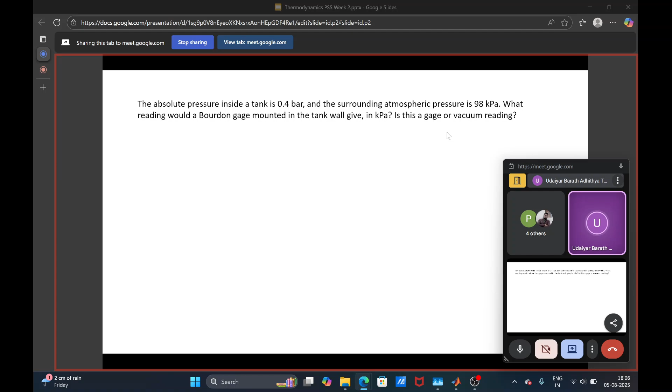So we have a tank, we have a gauge there, and we know that inside the tank the pressure is 40 kilopascal or 0.4 bar. That is the absolute pressure, and outside this tank is your atmosphere, which is at 98 kilopascal. Because the Bourdon gauge shows the difference, it will show the difference between these two. So you'll get 58 kilopascal, but that will be lower than atmospheric pressure, since your inside pressure is lower than atmospheric pressure. So this is a vacuum reading.

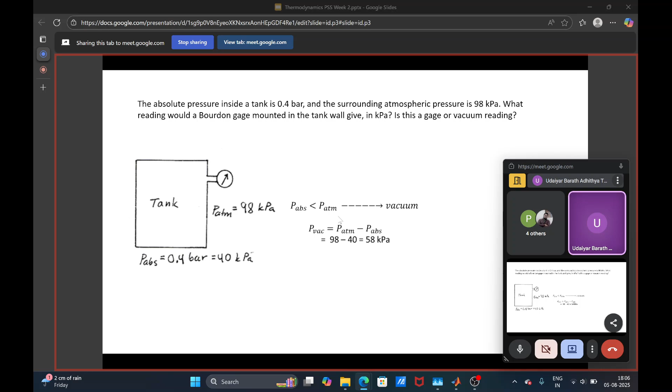So next question, a tornado rips off a 100 square meter roof with a mass of 1000 kg. What is the minimum vacuum pressure needed to do that if we neglect the anchoring forces? So you have a house and the roof mass is 1000 kg, and because of this tornado the roof is getting ripped up. The area is given, just 100 meter square. So what should be the minimum pressure inside the house? What is the vacuum pressure needed?

So outside, because of the tornado, your pressure has dropped. What should be the difference in pressure for the roof to be ripped apart? Try solving this. You can estimate the forces, and using that force and the area, find the pressure difference, and that will give you the answer. You can assume atmospheric pressure to be 100 kilopascal for this case, or 1.01 bar.

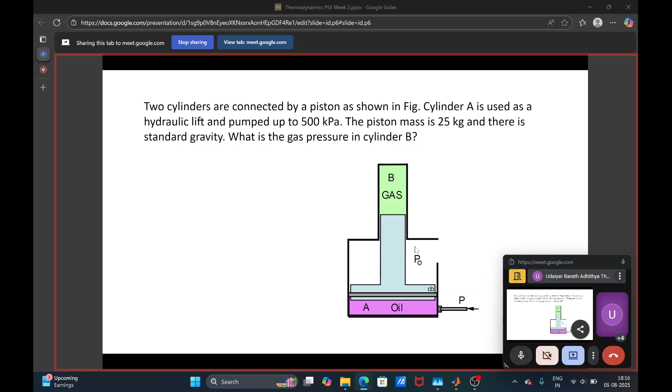So since the diameter of A is 100 mm or 0.1 meter, area A is 0.00785 meter square, and similarly for the 25 mm piston B diameter, area B is 0.00491 meter square. So they have found out the areas. You know the pressures except at B. So rearranging this equation, you get something like this. Substituting the pressures and the masses which you know, pressure at A is 500 kilopascal, which is given in the question, and the mass is 25 kg, and atmospheric pressure we can take as 100 kilopascal. So the force because of pressure at B comes out to be 2.944 kilonewton. So the pressure at B comes out to be 5996 kilopascal, just close to 6 megapascal.

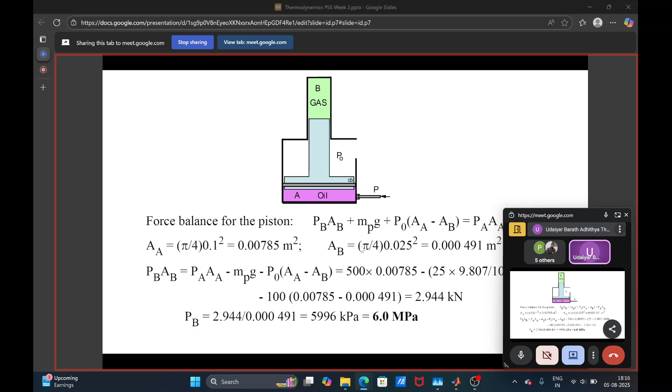So next question: the sketch shows three physical situations. Show the possible process in a PV diagram. So one, you have a piston cylinder arrangement. There is a rest here, but the piston is at the top. And in the second case, you have a similar piston cylinder arrangement, and the piston is supported by a spring. And in the third one, you have a piston, and there's a top rest where the piston cannot move up after that. So what do you think the possible process can be?

So assume in each case the piston is moving up. In the first case it was initially at the rest and then it's moving up. Similarly in B it is moving up, and even at C. So how will the process look? Try to sketch each of the cases. So we'll see how to solve this.

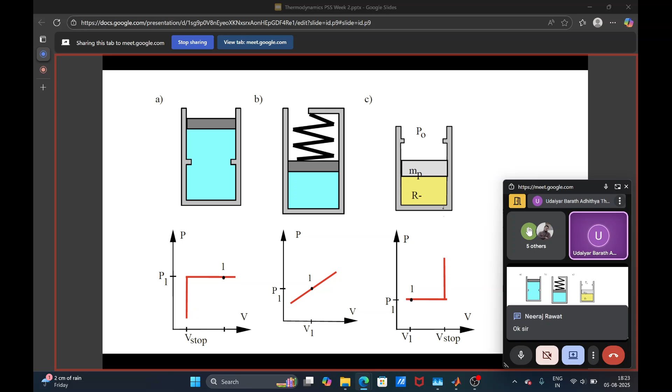Is it clear? Okay. So I will move to the next question.

The air drag force on a car is 0.225 A rho v square. Assume air at 290 Kelvin, 100 kilopascal, and a car frontal area of 4 meter square, driving at 90 kilometer per hour. How much energy is spent to overcome this?

Again, this is like estimating the work which has to be done. The air drag force is just like friction which is acting on the car. That is given by this expression here, 0.225 A rho v square, where v is the velocity and rho is the density. They have given the air pressure, the temperature, the frontal area of 4 meter square, and the velocity at which the car is being driven, 90 kilometer per hour. So how much energy has to be spent for this?

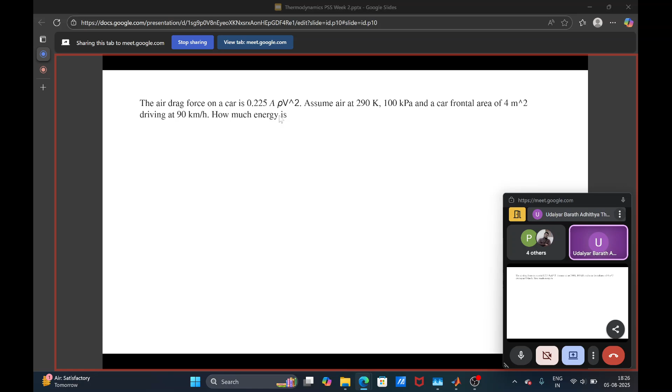For this, we now need to estimate the density. We know velocity; we need to find out density to estimate the drag force acting on the car. And for estimating density, what do we know? We know pressure and temperature. So air, we can assume it to be an ideal gas. This is how we'll solve it.

Density rho is equal to 1 by the specific volume. Assuming air as an ideal gas, we get PV is nRT or mRT. You have to be careful which R you are using. So rho is P by RT. You'll get 100 divided by 0.287 for air, into T is 290, which is given. From that we can estimate density. Density comes out to be 1.2015 kg per meter cube.

The velocity is given as 90 kilometer per hour. So 90 into 5 by 18, or 1000 by 3600, we get 25 meter per second. So now that you know rho and velocity, we can estimate the force.

So force is 0.225 A into rho v square, and maybe the question was to be driven for half an hour. Maybe I'll rewrite the question again while uploading. So delta x is v into delta t. So v we know is 25 meters per second. So delta t is 30 minutes. So 30 into 60, we get 45,000 meters. So that is what has been driven.

The car is driven assuming constant velocity of 90 kilometer per hour. So for half an hour, it will give you 45,000 meters. So force is 0.225 rho A v square. So A is given 4 meter square, rho we have calculated 1.2015, and v is 25 meters per second. So 25 square, we get force 676 Newton. So from there we can find out work. So work will be force into the length, or F delta x, which will come out to be 676 into 45,000. So that comes out to be 30.42 megajoules. So that is the amount of energy or work which has been spent.

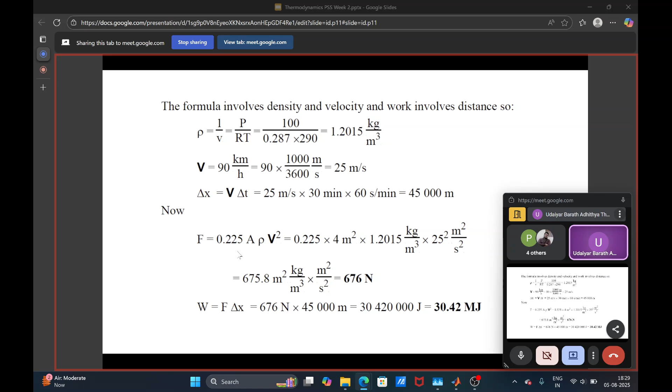So any doubt in this? Okay. So moving on.

We have a 400-liter tank A, see the figure below, contains argon gas at 250 kilopascal and 30 degrees Celsius. Cylinder B has a frictionless piston of such mass that a pressure of 150 kilopascal will float it. So it has a weight such that applying 150 kilopascal we can lift the piston. So that's what is given. The argon is contained in a 400-liter tank, and pressure and temperature is given. The valve is opened and argon flows into B and eventually reaches a uniform state of 150 kilopascal and 30 degrees Celsius throughout. So what is the work done by the argon?

So this is the process. If you see, this is similar to what we saw in the first sketching problems. Initially the pressure here is more than the pressure required to lift the piston. The piston requires just 150 kilopascal. So it will reach equilibrium when, because you are opening the valve, the argon will try to flow and it will lift the piston, and because you are expanding, your volume is increasing and your temperature is the same, so your pressure will reduce. By the ideal gas law, PV equals mRT, so if m, R and T are constant, PV is constant in this case. So with increase in volume, the pressure of the argon will go down. It will reach a state where it is reduced from 250 kilopascal to 150 kilopascal. There the piston will come to equilibrium and it will not move.

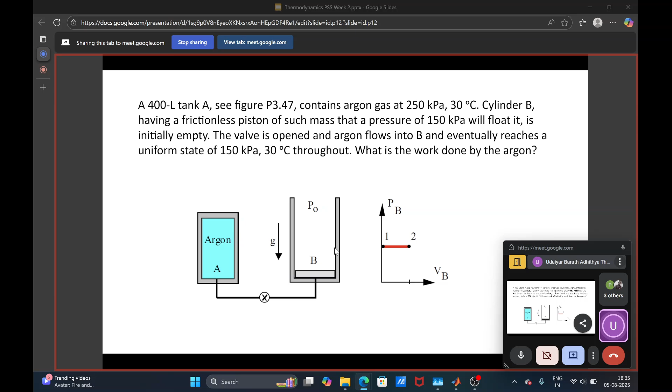So the external force which is required, which is acting, so indirectly what we are doing is, without finding out the mass of the piston, because the piston will move at 150 kilopascal, so that is the resistance which is acting on the piston. So P naught plus the piston weight is 150 kilopascal. So P external into VB2 minus VB1, we get 150 into 0.2667 minus 0. So it comes out to be 40 kilojoules.

Is this clear? So what we did is, based on the data, we estimated the initial and final volumes, and we didn't care about how the process is happening of the argon. And using that change in volume, we then used the external force which is acting on the piston, which is the resistive force, to estimate the work done of the system. Okay, I assume there is no doubt in this. So I'll move to the next question.

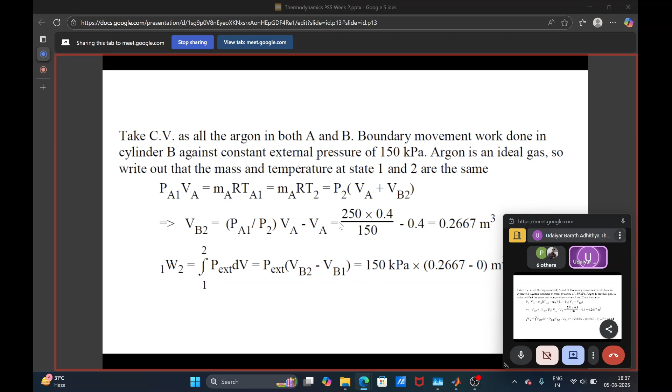Here, a 0.15 meter diameter pulley turns a belt rotating the drive shaft of a power plant pump. The torque applied by the belt on the pulley is 200 Newton meter and the power transmitted is 7 kilowatt. So determine the net force applied by the belt on the pulley in kilonewton and the rotational speed of the drive shaft in RPM.

So it's another form of work which we have to estimate. What is given is, you have a power plant pump which is used to pump water and so on. It is connected through a pulley, driven by a pulley which is of 0.15 meter diameter. The torque applied to this pulley by a belt is given as 200 Newton meter. They say the power transmitted is 7 kilowatts because of this torque. So we need to find out the net force applied by the belt on the pulley in kilonewton and the rotational speed of the drive shaft.

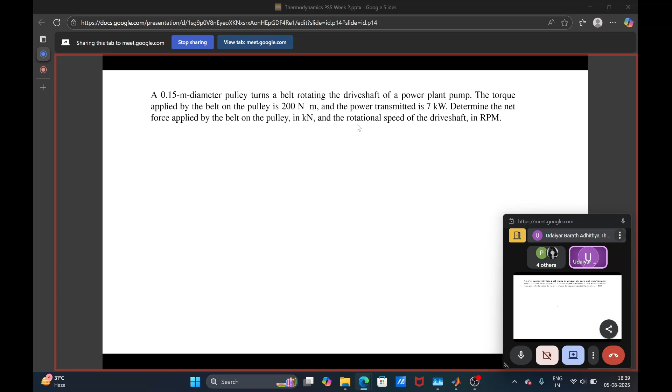And then power transmitted, power is your torque into omega, with which you can find out the rotational speed. We know the shaft power and we also know torque. You can estimate omega. So omega is 2 pi n by 60. Using that we can estimate n. So omega is power divided by torque, into 60 divided by 2 pi. So that's what we'll get. So n comes out to be 334.2 rpm. So it's just a simple problem on the torque and so on.

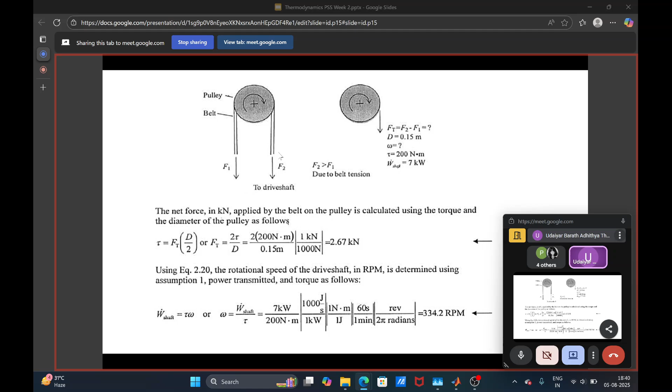So next question is on thermistor, basically a temperature measurement. You have a relation between resistance and temperature T for a thermistor, which closely follows R equals R naught exponential beta into 1 by T minus 1 by T naught, where R naught is the resistance in ohms measured at temperature T naught, and beta is a material constant with units of K.

For a particular thermistor, R naught is 2.2 ohms at T naught, which is 310 Kelvin. From a calibration test, it is found that R is 0.31 at 422 Kelvin. Determine the value of beta for the thermistor and make a plot of resistance versus temperature.

So I think it's a simple problem. I can try this. I'll give you a minute. Try.

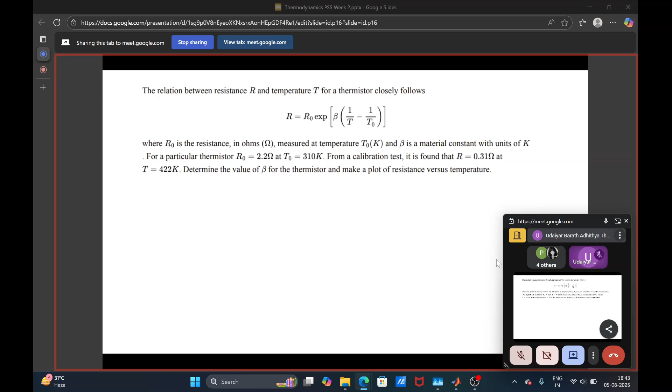So if you see, this is the expression. R is R naught exponential beta into 1 by T minus 1 by T naught. So we can write it the other way: ln R by R naught gives you beta. So beta comes out to be ln R by R naught divided by 1 by T minus 1 by T naught. So you know two points, basically, R naught at T naught and R at another T. Substitute these values here, and that will give you beta straight away. It will be 2288.9 Kelvin.

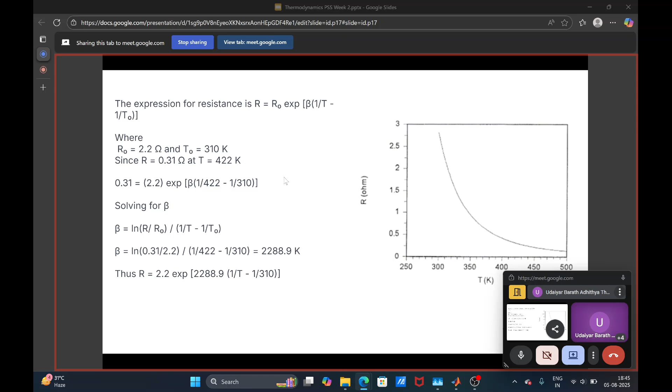So moving on to the next question. A fan forces air over a computer circuit board with surface area of 70 centimeter square to avoid overheating. The air temperature is 300 Kelvin while the circuit board surface temperature is 340 Kelvin. I think I have not given the table. Using the data, determine the largest and smallest heat transfer rate in watts that might be encountered for this forced convection.

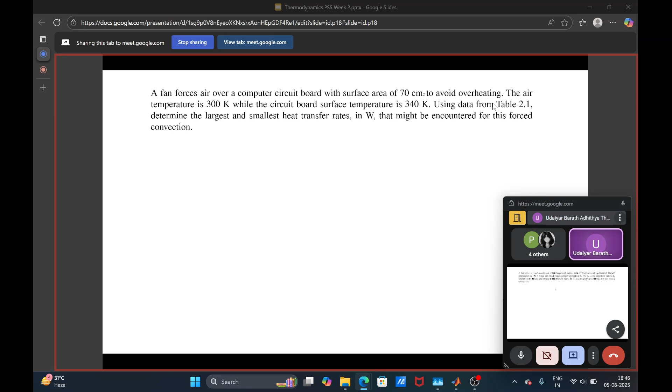So basically the heat transfer coefficient is given, and using that we have to find out what could be the largest and smallest heat transfer rates. So we have a circuit board and a fan here. This is similar to what you can see in your computers. You have your chips inside and a fan sitting above it to cool the chip. So it's a similar arrangement here.

You have a chip or a circuit board and it has to be cooled by a fan. The outside temperature is 300 Kelvin, your circuit board temperature is 340 Kelvin, and the area of the circuit board is 70 centimeter square. You estimate the smallest and largest heat transfer because of forced convection. The smallest heat transfer coefficient you can have is 25 watt per meter square Kelvin and the largest is 250 watt per meter square Kelvin.

So we use the simple Newton's law of cooling, h A delta T. 250 is the largest heat transfer coefficient, into the area, 70 centimeter square into 10 power minus 4 to convert it into meter square, into the temperature difference, which is 340 minus 300, so 40. It comes out to be 70 watts. Similarly, for the smallest heat transfer coefficient of 25, which is a factor of 10 lower, the smallest is 7 watts.

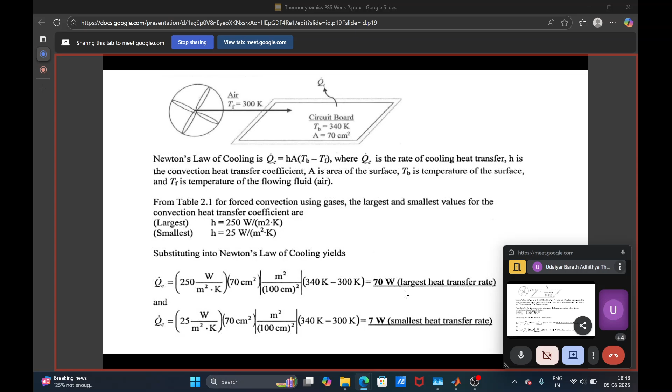Okay, moving on to next question.

Air is contained in a vertical piston cylinder assembly such that the piston is in static equilibrium. The atmosphere exerts a pressure of 101 kilopascal on top of the 0.5 meter diameter piston. The gauge pressure of the air inside the cylinder is 1.2 kilopascal. The local acceleration of gravity g is 9.81 meter per second square.

Subsequently, a weight is placed on top of the piston, causing the piston to fall until reaching a new static equilibrium position. At this position, the gauge pressure of the air inside the cylinder is 2.8 kilopascal. Determine the mass of the piston in kg and the mass of the added weight in kg. So you have to find out both the piston mass and the mass of the weight.

We know the initial pressure and the final pressure, all given. So it's again a simple problem of balancing the forces. Try this problem, I'll give you 2-3 minutes to solve. Simple problem here, see the solution. Similar problems we have encountered in the previous question, so try this out.

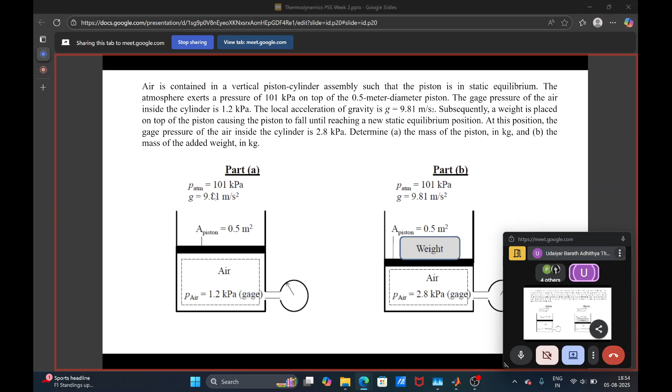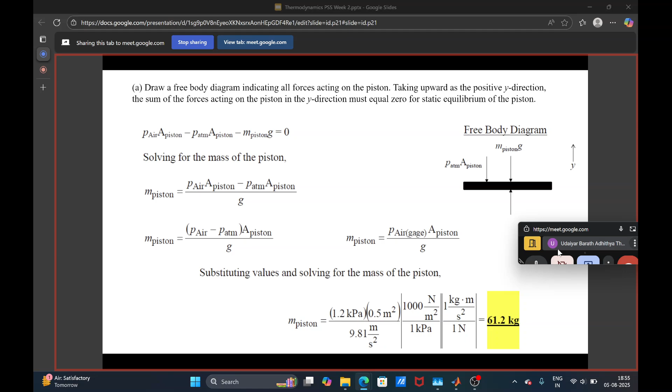So 1.2 kilopascal into 0.5 meter square divided by 9.81, converting it to pascals and so on, you get mass of piston is 61.2 kgs. So that's how we get the mass of the piston.

Similarly, for the second case, now instead of just the piston, we additionally have the weight, so that will also add some force. Using the same equation, now with an additional term minus m weight into g, and dividing by g, we get m weight after rearranging. This is what we get.

P air minus P atmosphere is given as 2.8 kilopascal in this case. So 2.8 into area of piston divided by g, minus mass of piston, gives mass of weight which comes out to be 81.5 kg.

Okay, so I hope there is no doubt in this question. Moving on to next question.

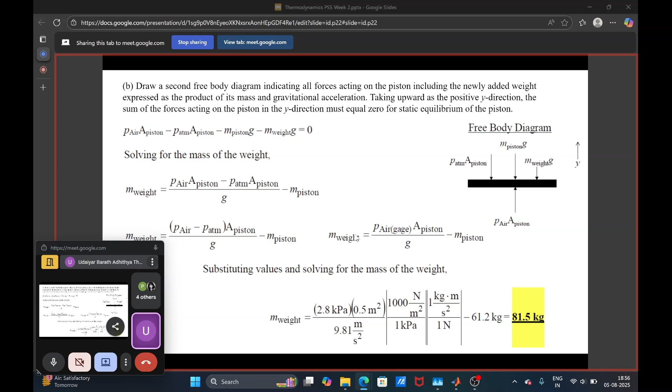A piston cylinder device contains 0.05 meter cube of gas initially at 200 kilopascal. At this state, a linear spring that has a spring constant of 150 kilonewton per meter is touching the piston but exerting no force on it. Now heat is transferred to the gas, causing the piston to rise and compress the spring until the volume inside the cylinder doubles. The cross sectional area of the piston is 0.25 meter square. Determine A, the final pressure inside the cylinder; B, the total work done by the gas; and C, the fraction of this work done against the spring to compress it.

So let's break down the question. This is similar to what we saw in the first case with the PV plot. Same case: the piston, you apply some heat, because of which you're transferring some energy, so the piston will start moving and compressing the spring. We've already seen why the pressure varies linearly, so we have a linear process from state 1 to 2.

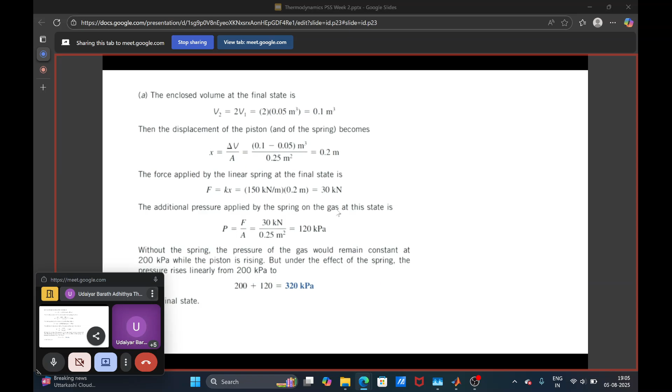So you can estimate it by just the triangle, or by subtracting the rectangle from the total work. So that comes out to be, spring work is half into (320 minus 200) into 0.05, which comes out to be 3 kilojoules. So what we did is the P delta V in the W spring, to find out the area. The other way of finding it is the simple physics we have seen, half kx square. So that again comes out to be 3 kilojoules. So both will be the same. It will not be any different.

So we see the total area, work done by the gas, is 13 kilojoules for the total area, and the atmospheric pressure acting on the piston is 10 kilojoules, and the spring work done is 3 kilojoules. So if we sum it up, the air system is giving out work, so that will be positive, the others will be negative, and the sum will be 0. So that is why the net will become 0. If you take the system plus surrounding, the surrounding is your spring and the atmosphere which is receiving that work. So the net work becomes 0. So the gas is 13 kilojoules.

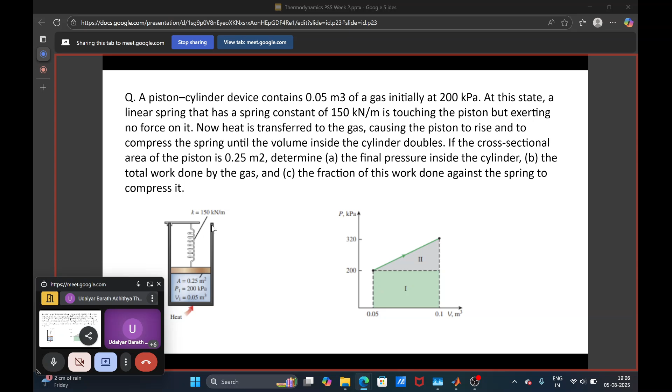Any doubt in this question? Okay, so we move on to the next.

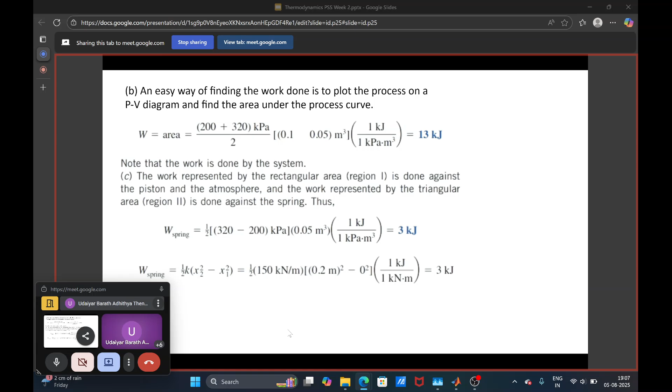Next question is, air is contained within a vertical piston cylinder assembly as shown in the below figure. On its top, the 10 kg piston is attached to a spring and exposed to an atmospheric pressure of 1 bar. Initially, the bottom of the piston is at x equal to 0 and the spring exerts a negligible force on the piston.

The valve is opened and the air enters the cylinder from the supply line, causing the volume of the air within the cylinder to increase by 3.9 into 10 power minus 4 meter cube. The force exerted by the spring as the air expands within the cylinder varies linearly with x. So it is given by F spring is kx, where k is 10,000 Newton per meter. The piston face area is 7.8 into 10 power minus 3 meter square.

So ignoring the friction between the piston and the cylinder wall, determine the pressure of the air within the cylinder in bar when the piston is in its initial position. Repeat when the piston is in its final position. The local acceleration of gravity is 9.81 meter per second square. So before showing the solution, I want you to at least try out or figure out how you will solve this question. In a sense, it's similar to what we saw previously. Just think over the question. I'll give you a minute or two.

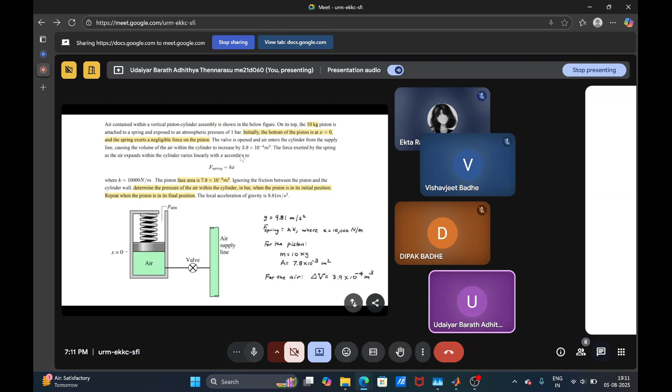So the initial case, the initial to find out the initial pressure, that's what we asked. To find out the initial position when the spring force is 0, we need to find out the pressure and the final pressure.

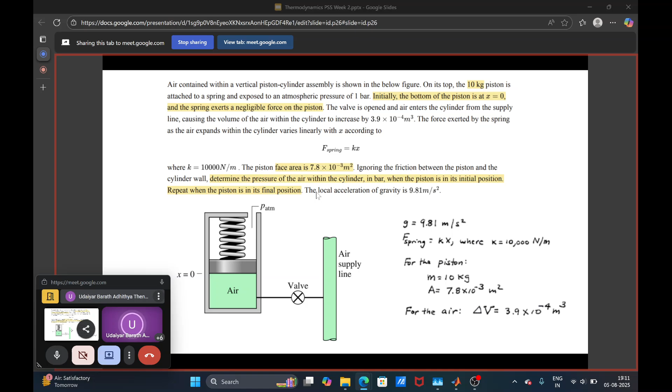So initially, if you say piston, these are the forces acting: the spring force, atmospheric pressure from the top, the air pressure, and the piston weight. Initially the spring force will be 0 at x equal to 0, and at that point if you calculate the net force, the pressure because of the gas into area equals the atmospheric pressure into area plus the piston weight. So with that we can estimate the pressure.

The atmospheric pressure is 1 bar and mass is given as 10 kg into g, 9.81, divided by area, which is 7.8 into 10 power minus 3, and divide by 10 power 5 to convert into bar. This comes out to be 1.126 bar. So that is the initial pressure within the cylinder.

So next is the final pressure. The spring force, atmospheric pressure, the air pressure, and the piston weight here, all 4 are present. So this is how the expression will look now. P2 is the second state: P2A equals P atmosphere into A plus the piston weight plus the spring force. With this we can find out P2.

To estimate the spring force, we need to find out the compression of the spring. The compression of the spring is calculated using the change in volume divided by area. Change in volume is 3.9 into 10 power minus 4 meter cube divided by area 7.8 into 10 power minus 3 meter square, which gives x equals 0.05 meter.

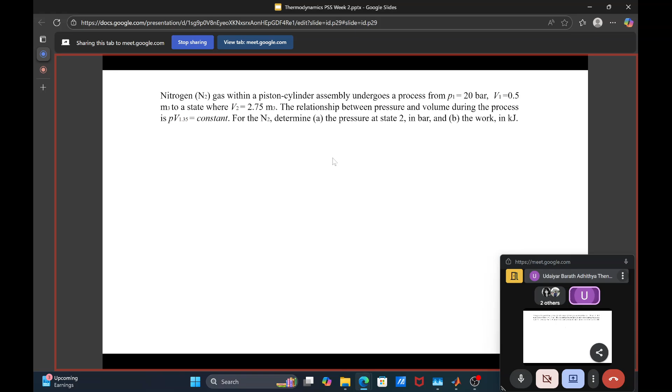We'll see how to solve this. As I said, P1 V1 raised to power n equals P2 V2 raised to power n, where n is 1.35 in this case. So P2 comes out to be: P1 is 20 bar, so 20 into (V1 by V2), which is 0.5 by 2.75, raised to power 1.35, comes out to be 2 bar.

So if you see, the volume is expanding, volume is increasing, so the pressure has come down from 20 bar to 2 bar. If you plot this in a PV curve, it will be like an exponential curve, similar to what we saw for the isothermal -- kind of a power curve, you can say.

The other part is to find out the work done for this process, which is the integration of P dV. We can estimate this expression by putting P as C by V^n and integrating it, getting an expression in terms of C, V and n. Replacing C again as PV raised to power n, we end up with this expression: P2 V2 minus P1 V1, divided by 1 minus n.

Now we know all the values. Substituting: P2 is 2 bar and V2 is 2.75, minus P1 is 20 and V1 is 0.5, divided by 1 minus 1.35, multiply by 10 power 5 because the pressures are in bar, and divide by 10 power 3 to convert into kilojoules. It comes out to be 1285.7 kilojoules.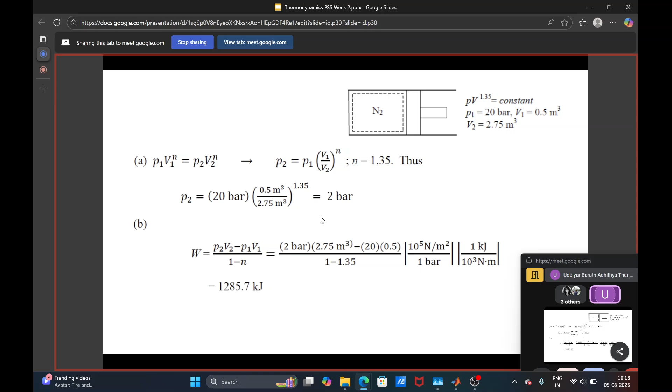So I have a gas in a piston cylinder assembly which undergoes an expansion process for which the relationship between pressure and volume is given by PV^n is constant. The initial pressure is given as 3 bar, the initial volume is 0.1 meter cube, and the final volume is 0.2 meter cube. We need to find the process work for 3 different processes: n is 1.5, n is 1, and n is 0.

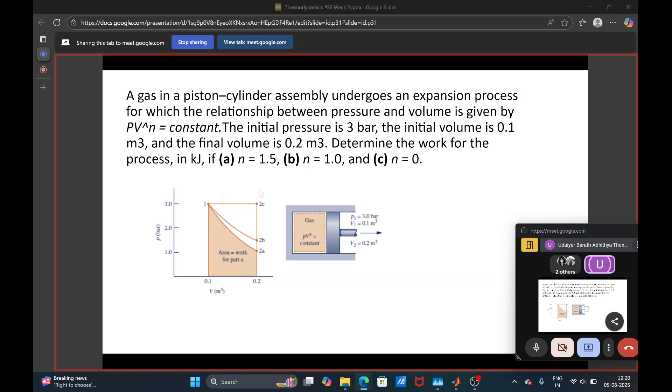So initial pressure is given as 3 bar and the initial volume is 0.1 meter cube, and we know the final volume which is 0.2 meter cube, but the final pressures will be different in each of the cases. In the third case, because pressure is constant, the pressure at the end will also be the same, but the others will not be. In the first case, you can use straight away the same formula which was used in the previous problem: W is (P2 V2 minus P1 V1) by (1 minus n). So it will come out to be that.

So for work, we can substitute the pressures and n. The only unknown here is the final pressure P2 when n is 1.5. In a similar way to what we did earlier, P2 is 1.06 bar, and substituting there we get work done as 17.6 kilojoules.

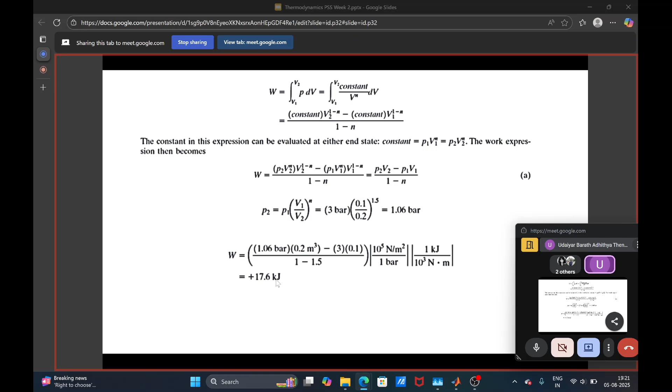The second is for n equals 1, where we perform the same thing again: the integration of P dV. Substituting P as constant by V, we get the integration of dV by V, with the constant outside. The integration of 1 by V is ln of V. So ln of V from state 1 to 2 gives ln V2 by V1, and the constant is PV. You can either use the initial state or the final state. Here we use the initial state because we know both pressure and volume at the initial state. Or you can estimate the final pressure as well: P1 V1 equals P2 V2, so you can find the pressure at the final state. So here P1 V1 ln V2 by V1 is what we get for work done.

So this comes out to be, substituting P1 is 3 bar, V1 is 0.1 meter cube, converting into bar and converting the whole thing into kilojoules, and ln V2 is 0.2 and V1 is 0.1, which is given. So it comes out to be 20.79 kilojoule. So that is the work for this process.

And if you see for third process, when n is 0, straight away P delta V. So integration of P dV, P is constant, so we can take it out. So it becomes delta V. So P delta V. So pressure is 3 bar and V is 0.2 minus 0.1, which is 0.1, multiplied by 10 power 5 divided by 10 power 3, which will give you 30 kilojoules. So that is the work done for the third case.

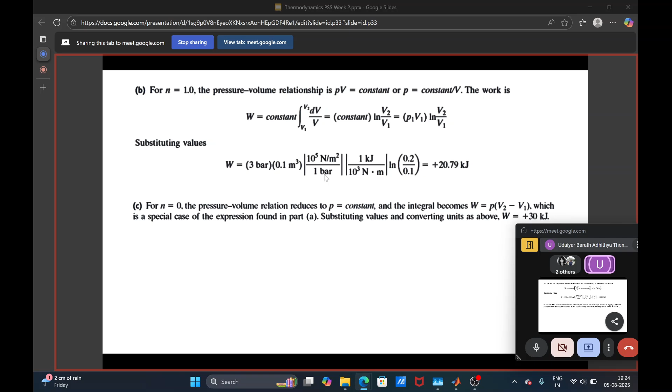So the simple problem on estimating work for different process. So any question in this? If not, I think I have last one problem for today. Let's see, and we can end the session for today. Or if you have any doubts, you can ask on that.